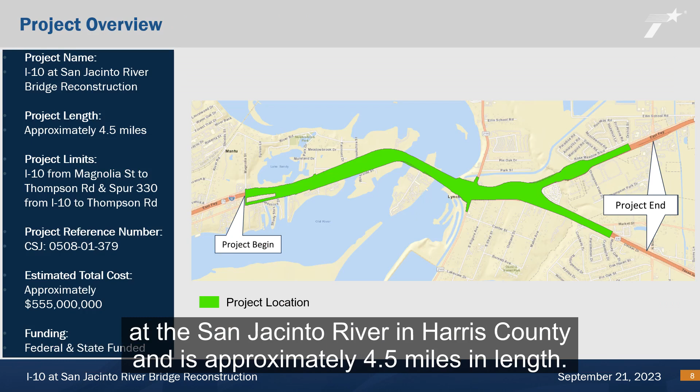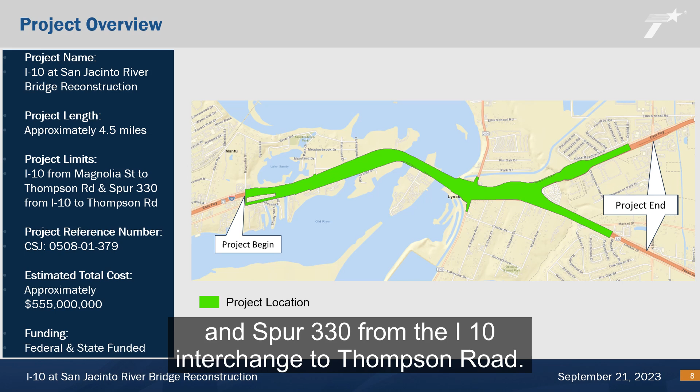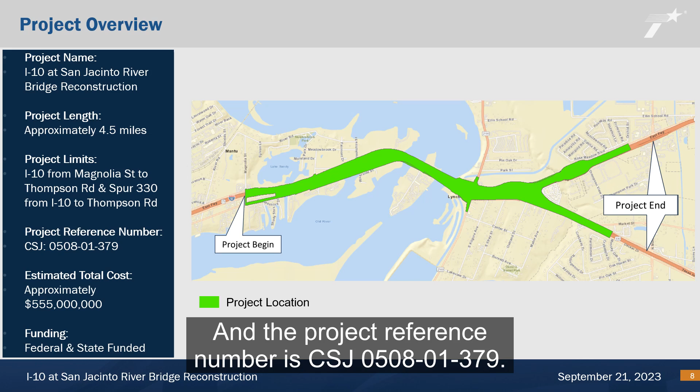The proposed project is located at I-10 at the San Jacinto River in Harris County and is approximately 4.5 miles in length. The project limits are I-10 from Magnolia Street to Thompson Road and Spur 330 from the I-10 interchange to Thompson Road, and the project reference number is CSJ 0508-01-379. The project is funded by federal and state funds, and the total project cost estimate is $555 million.

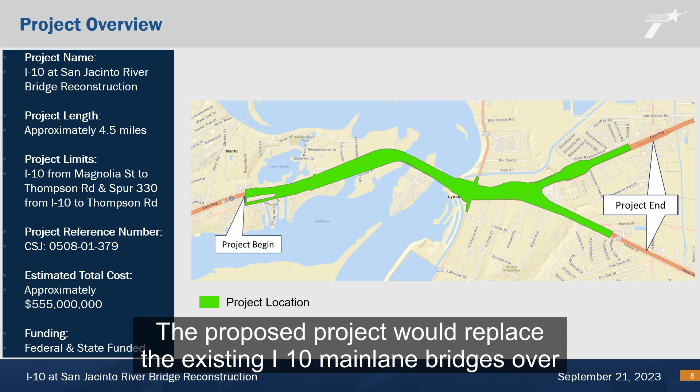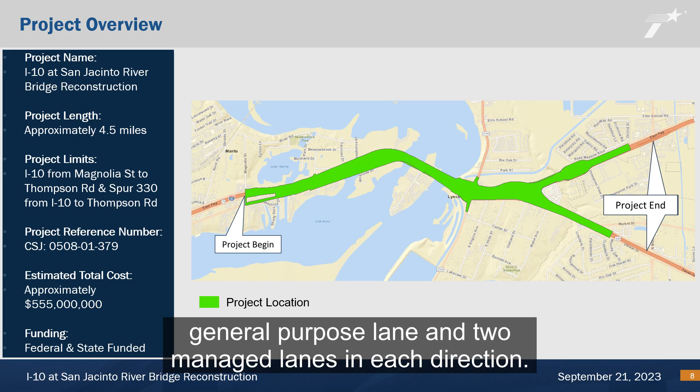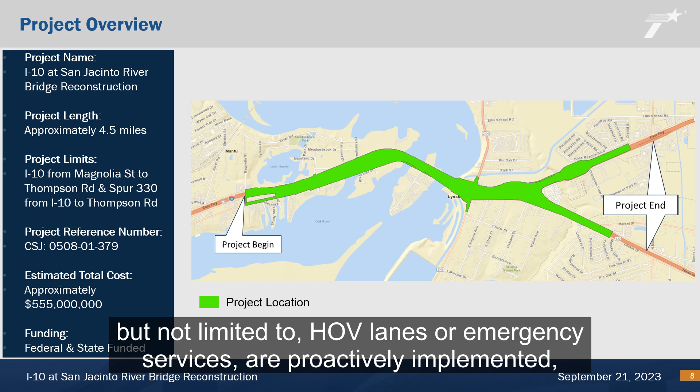The proposed project would replace the existing I-10 main lane bridges over the San Jacinto River, add vehicular capacity by adding one general purpose lane and two managed lanes in each direction. Managed lanes are highway lanes where operational strategies such as, but not limited to, HOV lanes or emergency services are proactively implemented and managed in response to changing conditions.

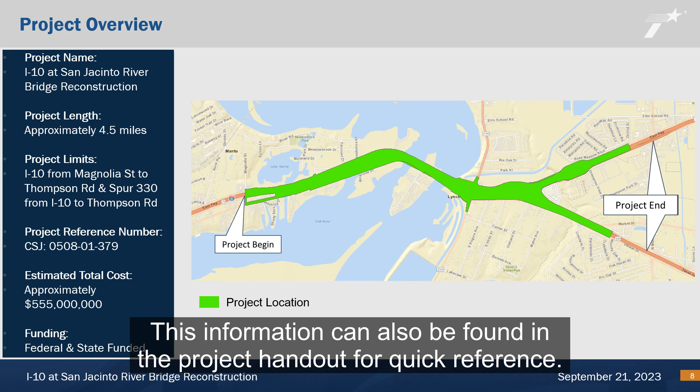Proposed improvements along Spur 330 include widening to add one managed lane in each direction and connect to the proposed I-10 managed lanes. This information can also be found in the project handout for quick reference. In the next several slides, I will discuss the need for and purpose of the project.

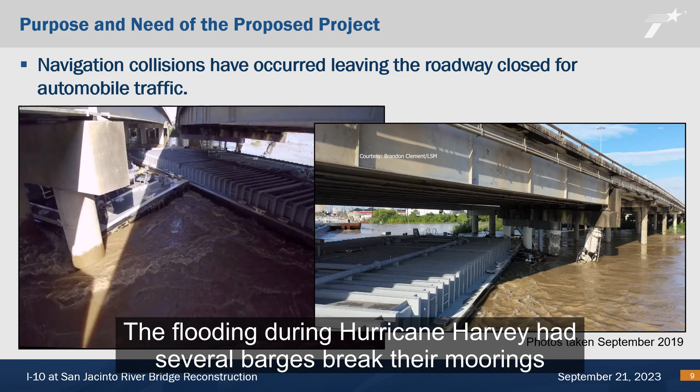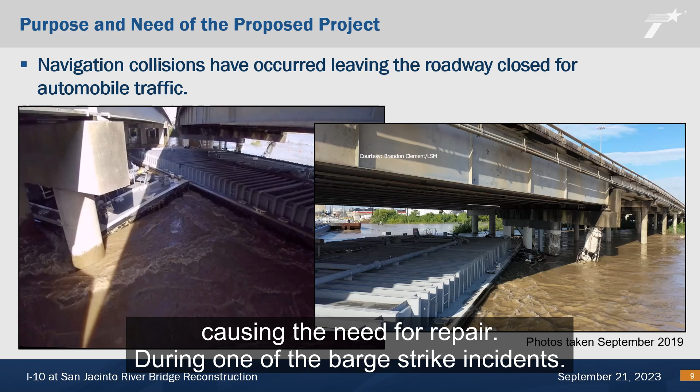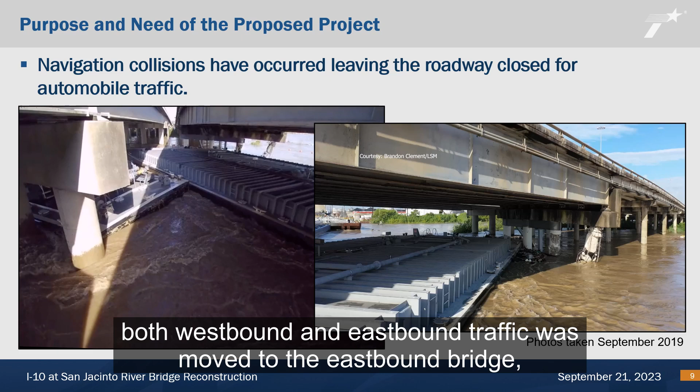The flooding during Hurricane Harvey had several barges break their moorings and impact the existing bridge protection system, causing substantial damage. The flooding also caused significant scour to the existing bridge footings, causing the need for repair. During one of the barge strike incidents, the damage required the westbound main lanes to be closed during the repair. Both westbound and eastbound traffic was moved to the eastbound bridge, requiring lane reductions resulting in significant traffic delays.

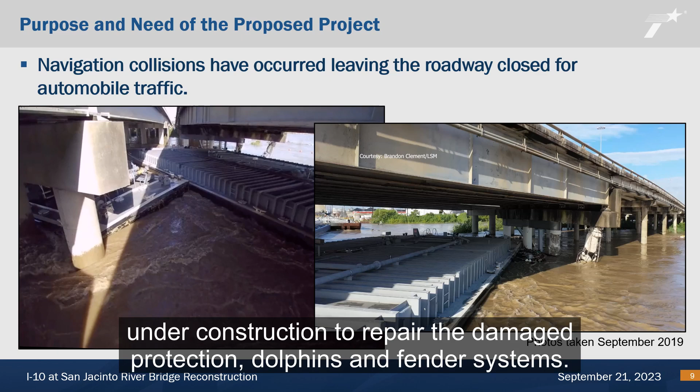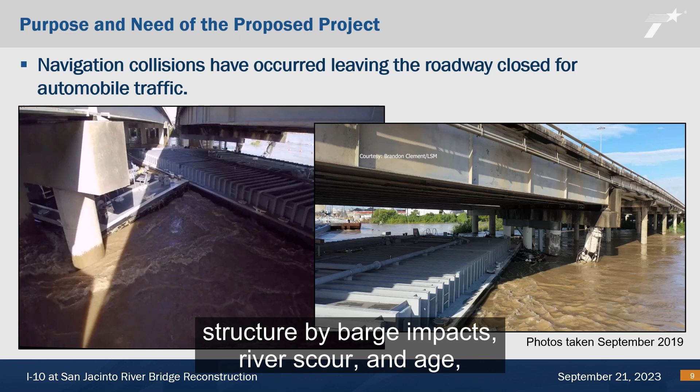Currently, there is a retrofit project under construction to repair the damaged protection dolphins and fender systems. The bridge structures currently in use were constructed in 1968 and 1996. Due to the frequent damage to the existing structure by barge impacts, river scour, and age, the bridges are programmed for replacement.

The Houston District has multiple planned projects along the I-10 corridor across the district. The managed lanes are programmed to run from I-69 to SH-99, a distance of almost 30 miles. Because the replacement of the bridges over the San Jacinto River are the highest priority for the district, and the cost associated with constructing new bridge structures, it is preferred that the managed lanes be constructed at the same time as the bridge replacements. As such, this section of I-10 would be the first in the series of managed lanes to be evaluated. These managed lanes would help provide congestion relief within the project corridor itself.

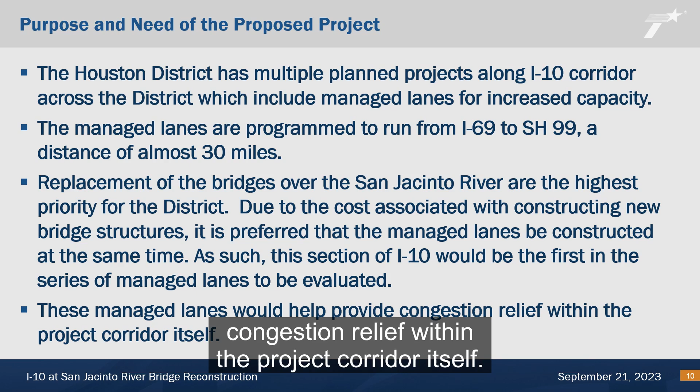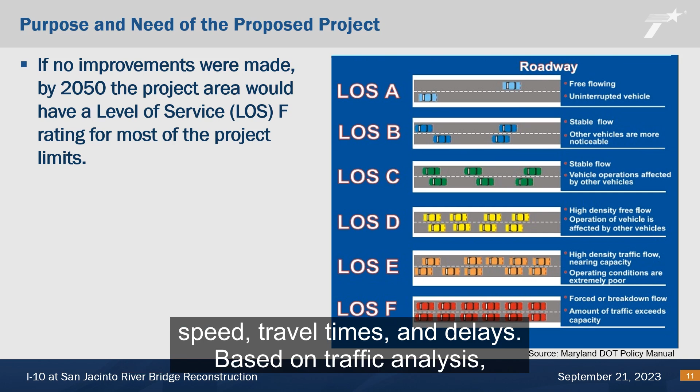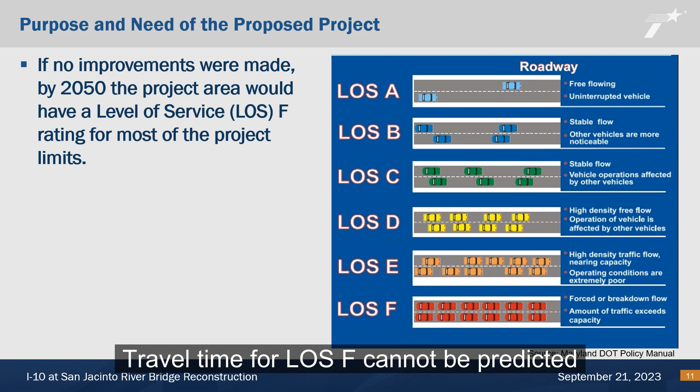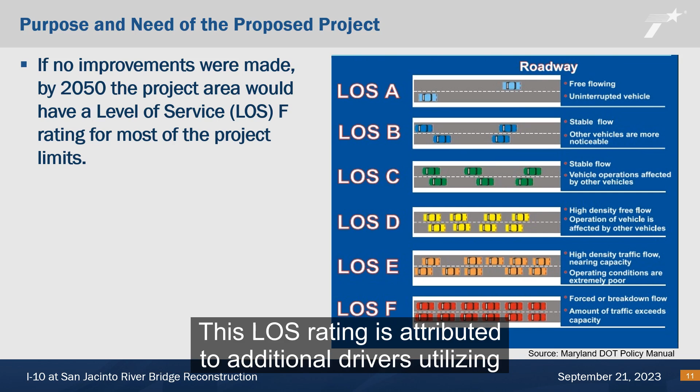Level of service, or LOS, describes conditions of a roadway based on driving speed, travel times, and delays. Based on traffic analysis, if no improvements are made by 2050, this section of I-10 is shown to have an LOS rating of F. An F rating is the worst rating possible in terms of LOS, meaning that there are frequent slowdowns and traffic jams. Travel time for LOS F cannot be predicted as there is more demand than capacity on the roadway. This LOS is in a constant traffic jam, attributed to additional drivers utilizing the roadway than what is currently using the roadway today.

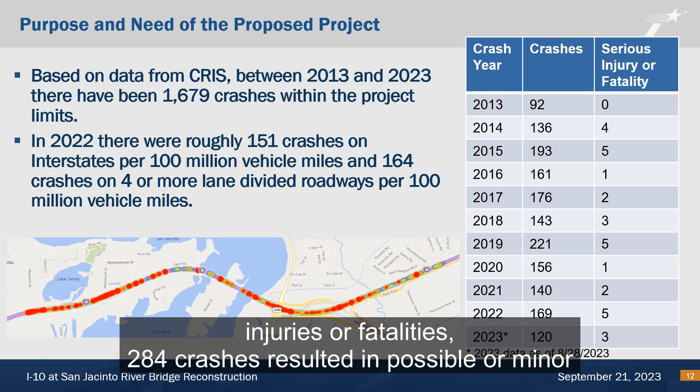Within the last 10 years, 31 of the crashes have resulted in serious injuries or fatalities. 284 crashes resulted in possible or minor injuries, and 19 of the crashes are of unknown severity.

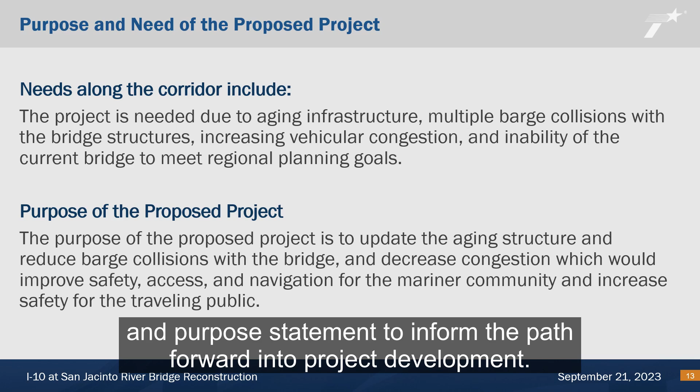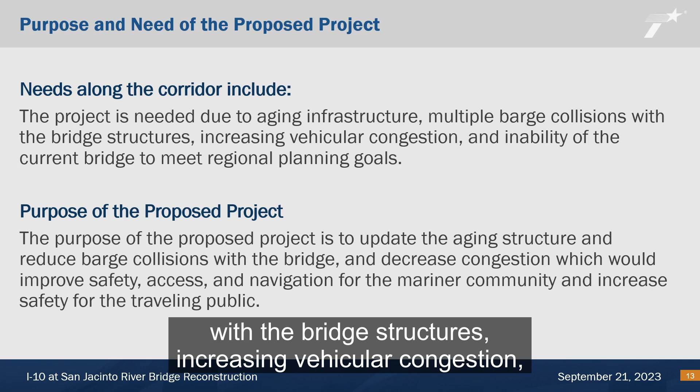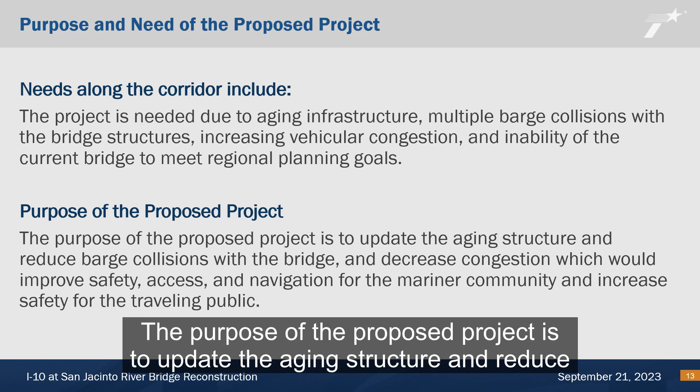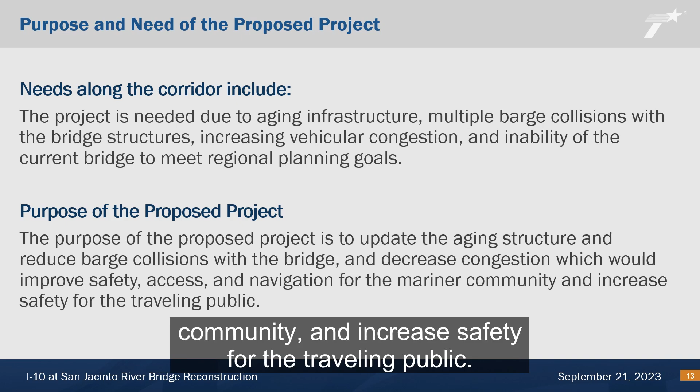After reviewing all the needs of the corridor, the project team developed a need and purpose statement to inform the path forward into project development. The proposed improvements would need to satisfy all the needs of the corridor and meet the purpose of the project. The project is needed due to aging infrastructure, multiple barge collisions with the bridge structures, increasing vehicular congestion, and the inability of the current bridge to meet regional planning goals. The purpose of the proposed project is to update the aging structure and reduce barge collisions with the bridge, and decrease congestion, which would improve safety, access, and navigation for the mariner community, and increase safety for the traveling public.

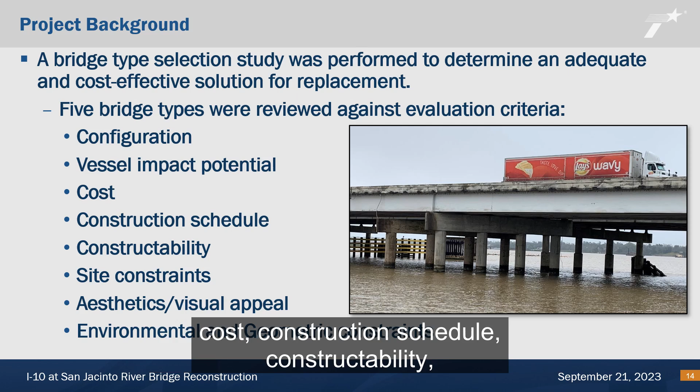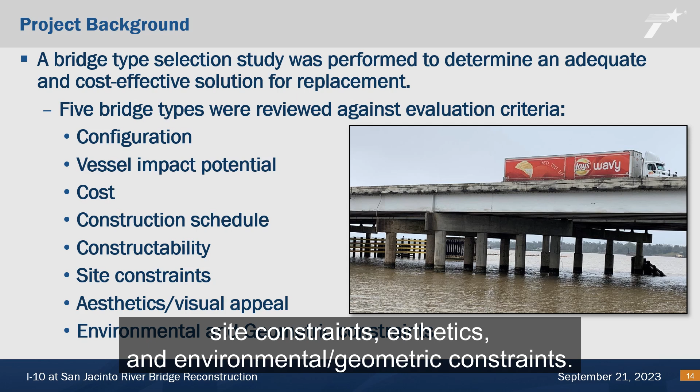A bridge type selection study was performed to determine an adequate and cost-effective solution for replacement. 5 bridge types were reviewed utilizing set evaluation criteria. Evaluation criteria categories included configuration, vessel impact potential, cost, construction schedule, constructability, site constraints, aesthetics, and environmental/geometric constraints. After evaluation of all criteria, steel girder bridges, like the one shown on this slide, were recommended for the new bridges.

A navigational clearances report was prepared to review waterway obstructions with existing clearance envelopes, limited vessel survey, and marine facilities within a 3-mile radius of the proposed project.

TxDOT completed outreach efforts to notify the surrounding mariner community about the upcoming bridge replacement and to collect stakeholder input. The outreach efforts included identifying the appropriate mariner community stakeholders, holding a virtual meeting with presentation, and sending a navigational questionnaire to the mariner community stakeholders. The virtual meeting occurred in August 2021, and the navigational questionnaire was sent to 70 members of the mariner community in August and November 2021.

After the initial mariner community stakeholder outreach efforts, TxDOT developed bridge design alternatives and presented feasible options to the Lone Star Harbor Safety Committee in June and July 2022. The questionnaire was sent to the mariner community again after the June 2022 meeting with the Lone Star Harbor Safety Committee.

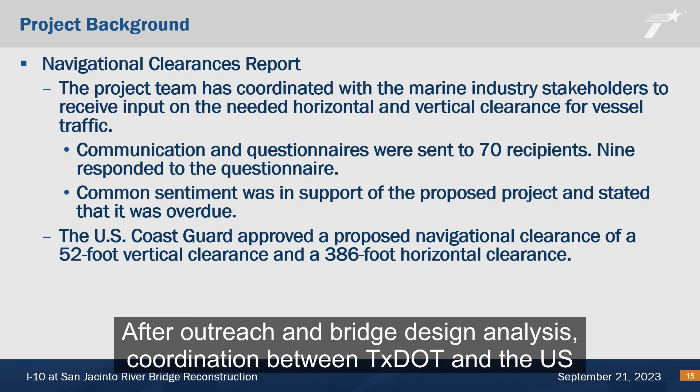After outreach and bridge design analysis, coordination between TxDOT and the U.S. Coast Guard, USCG, occurred. Through this coordination, USCG approved the proposed navigational clearance, consisting of a 52-foot vertical clearance and a 386-foot horizontal clearance.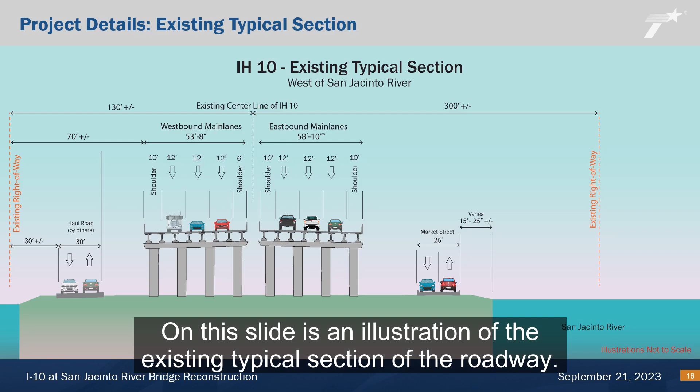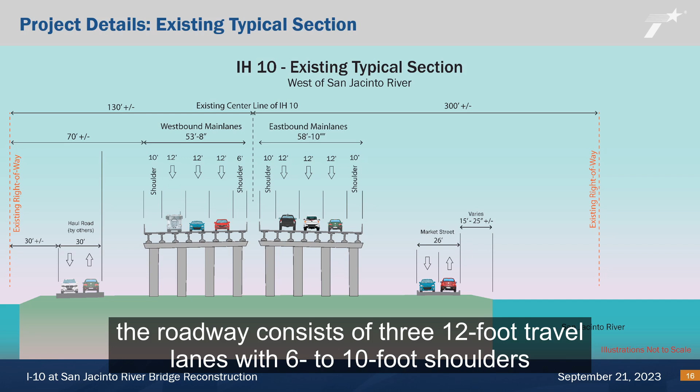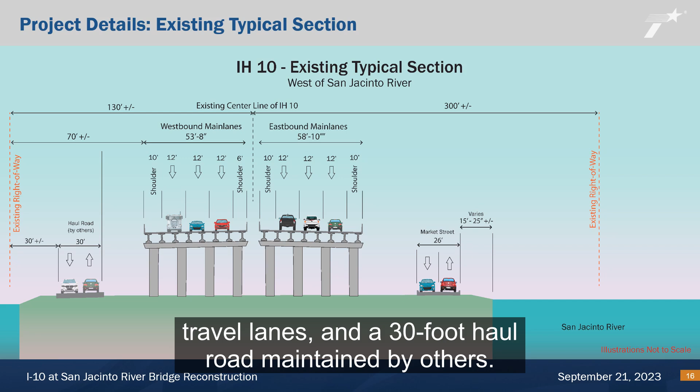On this slide is an illustration of the existing typical section of the roadway. A typical section is a cross-section of the road how it looks today. The roadway main lane and frontage roads vary in number and configuration, but at this location, just west of the river crossing, the roadway consists of 3 12-foot travel lanes with 6 to 10-foot shoulders in each direction, Market Street, consisting of 2 13-foot travel lanes, and a 30-foot haul road, maintained by others. The right-of-way varies throughout the corridor as well.

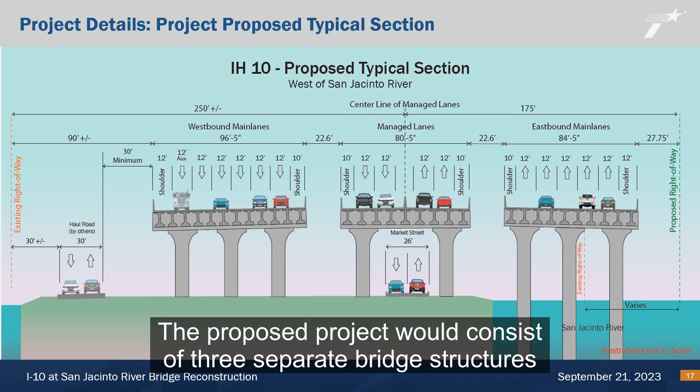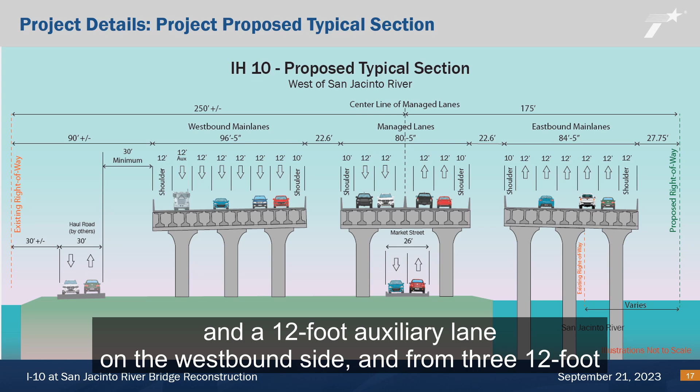No frontage roads are located in this section. This slide illustrates the proposed typical section, or a cross-section of what the road would look like with the proposed project. The proposed project would consist of 3 separate bridge structures and would widen the main lanes from 3 12-foot travel lanes to 5 12-foot travel lanes, and a 12-foot auxiliary lane on the westbound side, and from 3 12-foot travel lanes to 5 12-foot travel lanes on the eastbound side. There would be 12-foot wide outside shoulders and 10-foot wide inside shoulders on both east and westbound travel lanes.

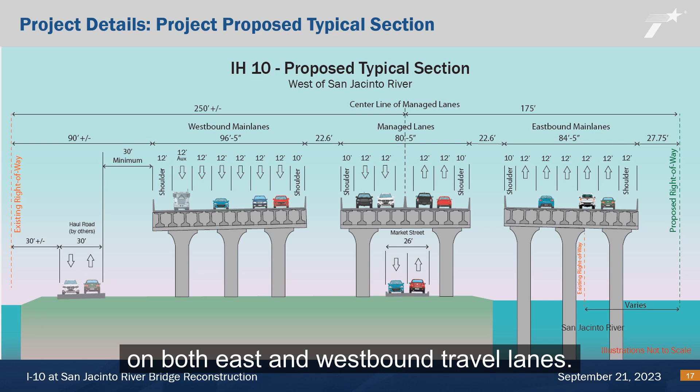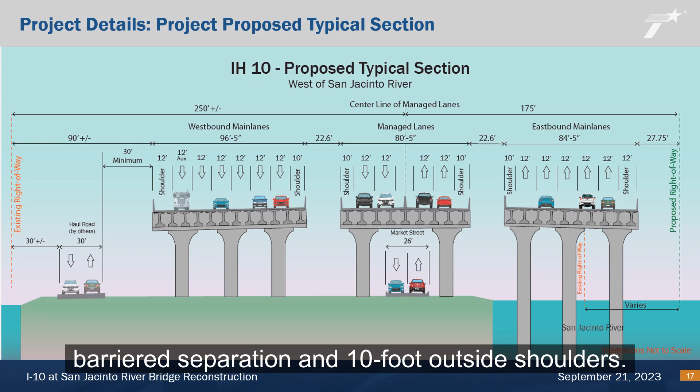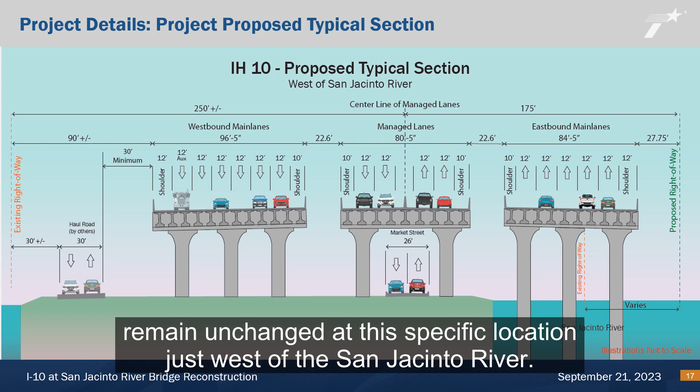4 12-foot managed lanes, 2 in each direction, would be between the eastbound and westbound main lanes, with a 5-foot barriered separation and 10-foot outside shoulders. Market Street and Haul Road would remain unchanged at this specific location, just west of the San Jacinto River.

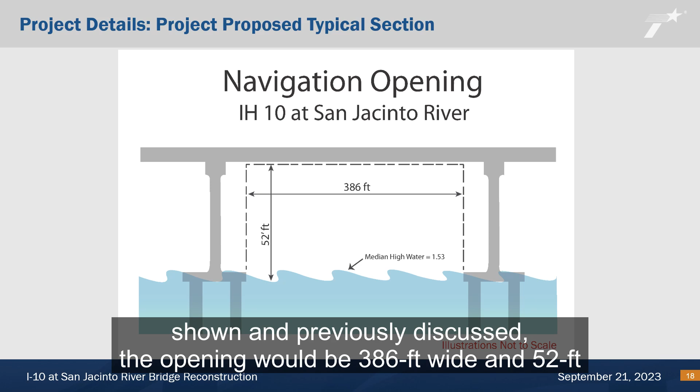This graphic illustrates the proposed navigation opening if the proposed project is constructed. As shown and previously discussed, the opening would be 386 feet wide and 52 feet high, with the median high water mark being 1.53 feet.

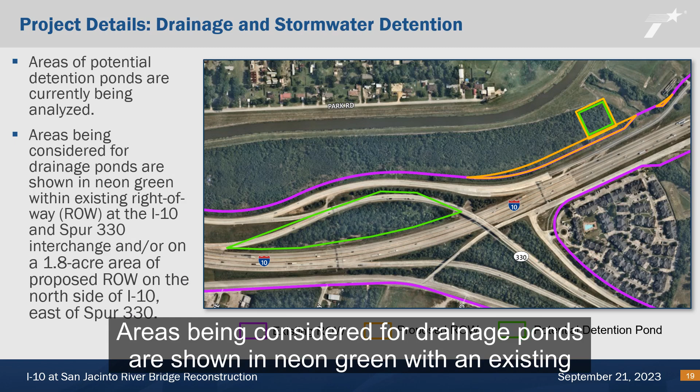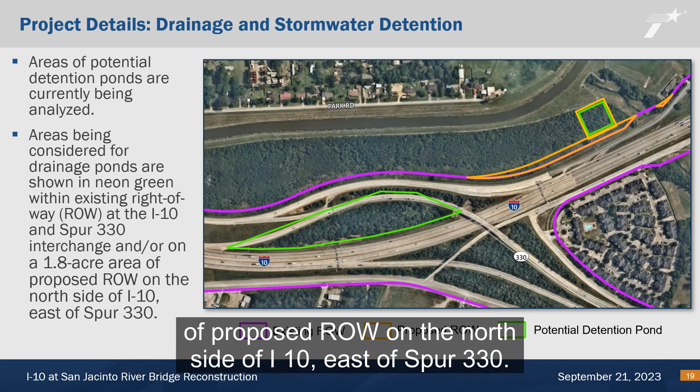Areas of potential detention ponds are currently being analyzed. Areas being considered for drainage ponds are shown in neon green, within existing right-of-way at the I-10 and Spur 330 interchange, and/or on a 1.8 acre area of proposed right-of-way on the north side of I-10, east of Spur 330. The proposed project would require approximately 5.4 acres of new right-of-way.

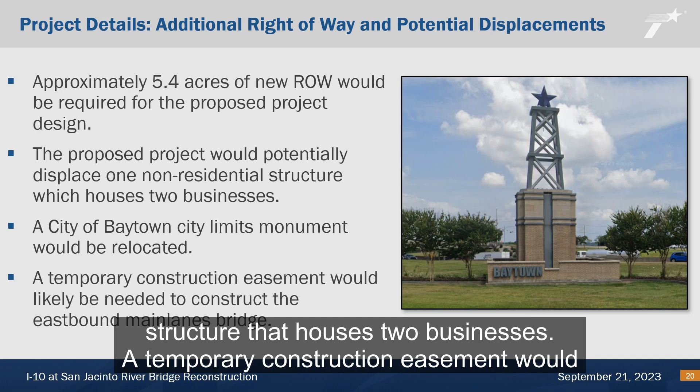Additionally, the proposed project would potentially displace one non-residential structure that houses 2 businesses. A temporary construction easement would likely be needed to construct the eastbound main lane bridge. The areas in orange are the areas where additional right-of-way would be needed for the project.

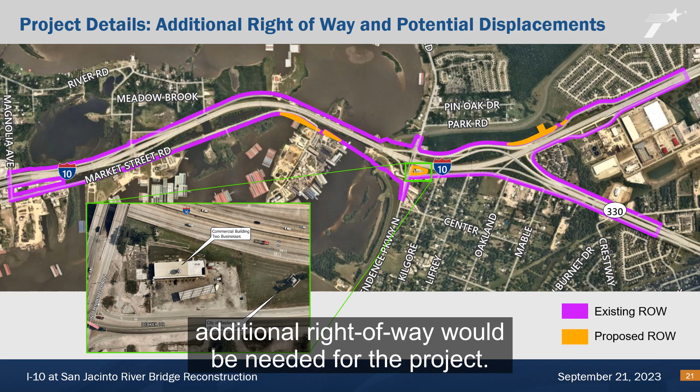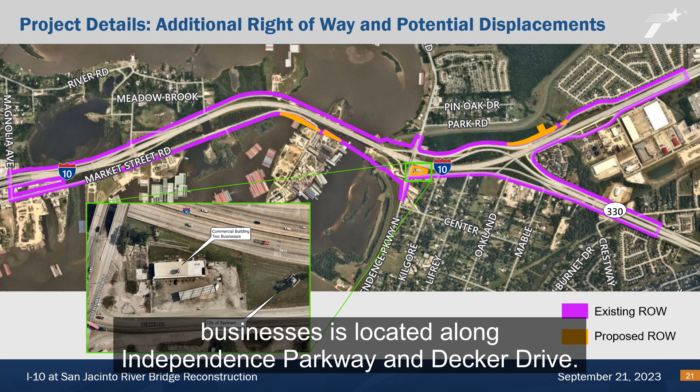The potential displacement of the one non-residential structure that houses 2 businesses is located along Independence Parkway and Decker Drive. The City of Baytown Monument is within the same area.

The project team is identifying and evaluating potential environmental impacts that could occur as a result of constructing the proposed project. Areas under review include biological resources, community impacts, environmental justice, water resources, hazardous materials, archaeological resources, historic resources, and traffic noise.

The project would be designed to avoid or minimize impacts to the greatest amount practicable. Once completed, technical reports documenting the analysis and conclusions of these studies will be available for review upon request.

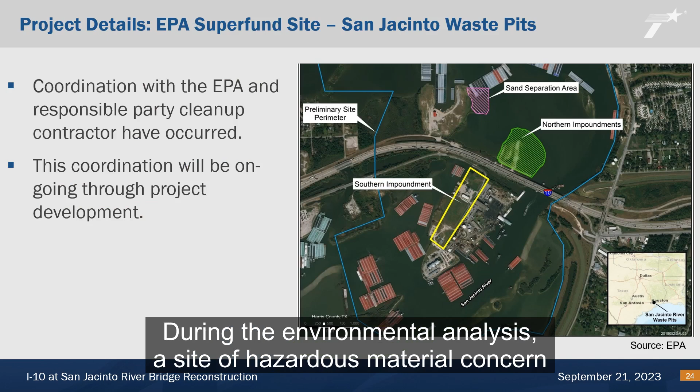During the environmental analysis, a site of hazardous material concern called the San Jacinto Waste Pits was identified. This area is classified by the Environmental Protection Agency, EPA, as a Superfund site. A Superfund site is the common name given to areas with known hazardous waste contamination.

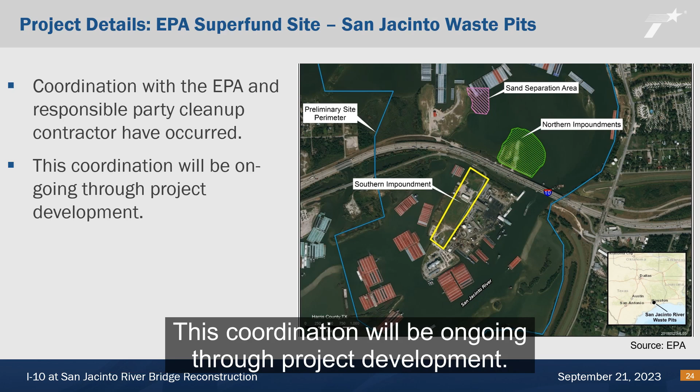Please visit www.epa.gov/tx/SJRWP for more information on this site specifically. Coordination with the EPA and the responsible party cleanup contractor have occurred. This coordination will be ongoing through project development.

The proposed project would be funded with a combination of federal and state funds for a total of approximately $555 million.